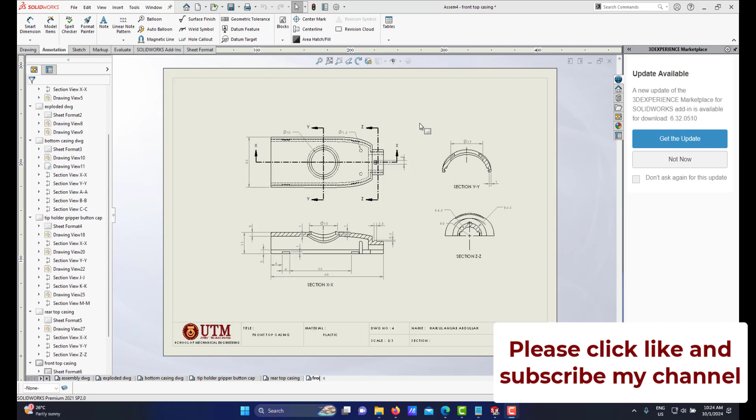Previously I showed you, in part 1 of my video, how I do part modeling of the main casing of the electric eraser, and I split it into top casing and bottom casing. Then I separately split the top casing into rear top casing and front top casing.

I've also shown you part modeling of the other components like the tip holder, the gripper, the push button, and the cap. Besides, I've shown you modeling of the AAA batteries, because that is a standard component, but it must be modeled in Solidworks to do assembly. I've also done modeling on the switch button and other standard components.

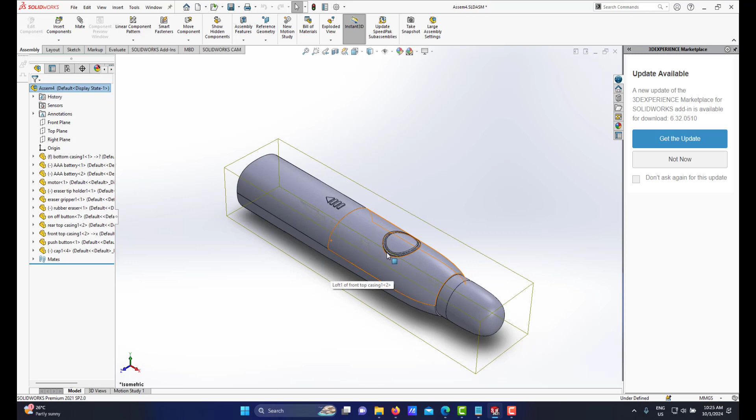I've shown you how I do part modeling of all the components, the parts of your electric eraser, and also how I do the assembly file of the electric eraser. So this is, as shown here, the exploded view, and we have this collapse view. I've already shown you that.

I've already shown you how I do this exploded view to show the exploded line sketch, and I've shown you a set of working drawings, how I do the assembly drawing, the exploded drawing, the bottom casing, and the other four components, the rear top casing and front top casing. So this will be a full set of your working drawing.

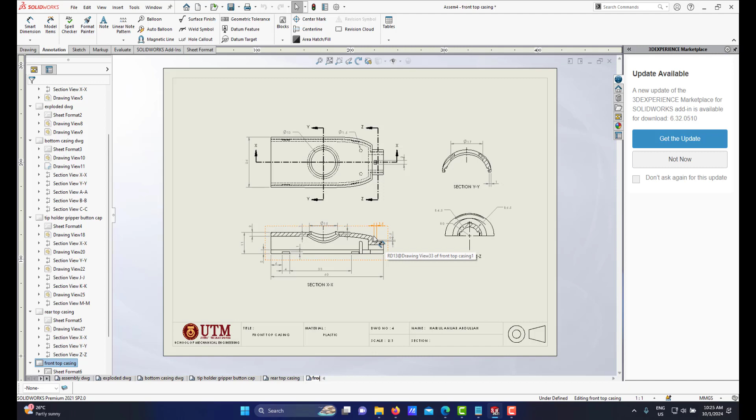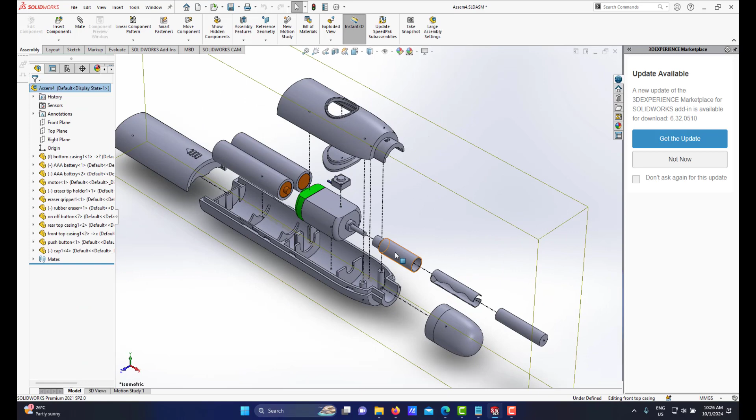This video I need to explain how you send your work. You upload it to e-learning. You have two categories, two parts to be uploaded. The first part will be your Solidworks assembly file plus your part modeling of each component.

To do this, you don't simply just save your assembly file and all your part modeling file and upload it to e-learning. That is not the way to do it. Because we need to do pack and go, you must do pack and go. It means it compiles everything, your assembly file together, because the assembly file is kind of like the parent. You compile it with all the children, all the part modeling of all the components involved in your assembly.

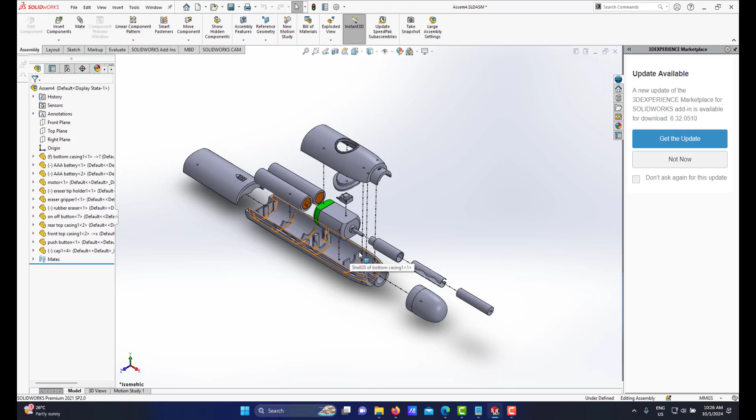So it will be packed into one package. To do this, you will do pack and go. You can save your assembly either in exploded mode or in collapse mode. For example, you save in this, which is acceptable, in exploded view mode.

To do pack and go, under the file here, you do not use save. Under file, what you do is go for pack and go. So in the menu here we have pack and go, and this menu appears.

Do not change anything. This all we have the assembly file together with all the part modeling files that we have done involved in your assembly will be selected. Do not change anything. Here, to save to folder, you will browse to where you want to put the pack and go file in your laptop.

I would suggest saving it to the desktop of your laptop. For example, I browse here, go to the desktop, and make a new folder, in my case folder number 9. So I will double click and select the folder, meaning my pack and go will be put under my desktop under new folder 9.

Do not change anything, just remain as it is, and I just click save. What it will do, Solidworks will pack and go. It will compile the assembly file together with the children, all the part modeling files, into one folder.

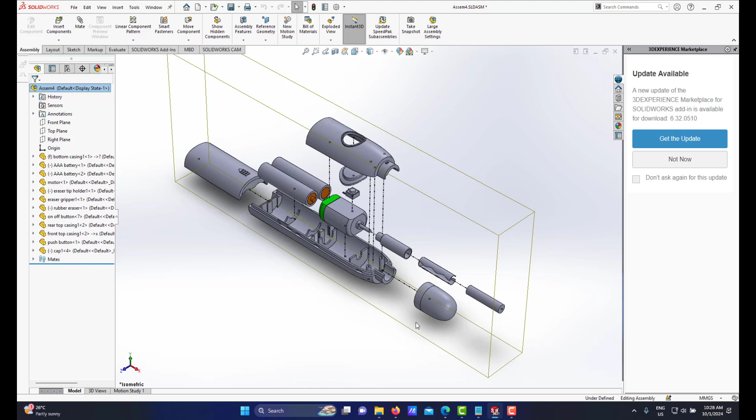Let me show you. Now this is my desktop screen. If you look under this new folder 9, we have all the parts, the assembly file together with the part files. Alright, another thing is I don't want you to do it like this.

What I want you to do is make sure in your laptop you have already installed what we call WinRAR or WinZip. I would suggest WinRAR. Install WinRAR, and you know what WinRAR is - you can compress it into one single file.

So what I will do here is select everything and right click. Under WinRAR here, I will make the name of this compressed file. This is a compressed file, I will compress it using WinRAR, then I name it, for example, electric eraser, and click OK. So it will compress into one file here.

So all the other files, I delete them. This electric eraser compressed file has a set of the assembly file and the part modeling files. This compressed file, you upload into your e-learning. So this will be part one.

About part two, it is a set of working drawings. If you look here, this is the set of your working drawing.

For part number two, this drawing, you will not upload this drawing because it is a SolidWorks drawing file. The format for the drawing is DRW. You will not do this. I want you to save it as a PDF.

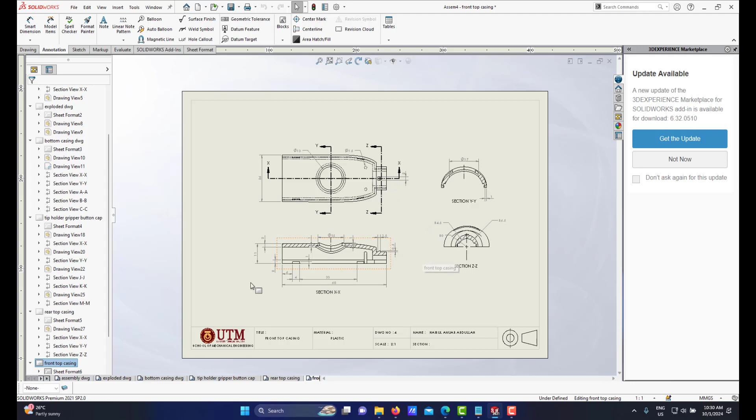Here, the first page is the assembly drawing. We have the first page, second page, exploded, up until the front top casing which is the last page. Make sure before you compile to make the one set of PDF, everything is done, as maybe you have some modification.

The title block is completed. The name is right, material is done. Your section, your name, drawing number also must be right. The scale must be right.

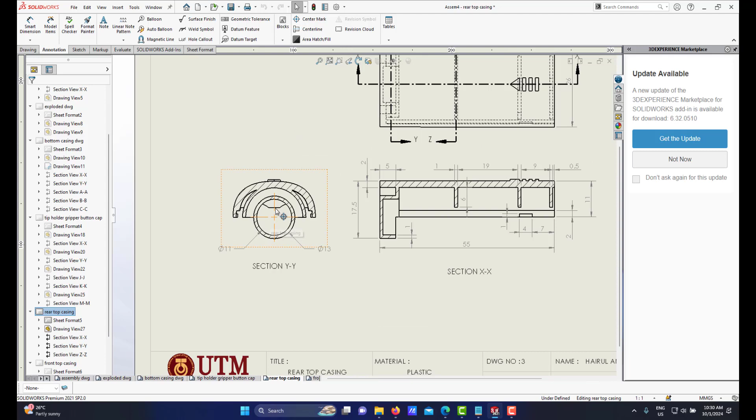For example, I want to make a final adjustment here. For example, here there is a kind of cylindrical shape. I must have the center line here under rotation, because that is a cylindrical shape. There must be a center line.

After you have made all the final adjustments and saved your file, then only you compile your set of working drawing as a PDF file. So how do we compile it as a PDF file?

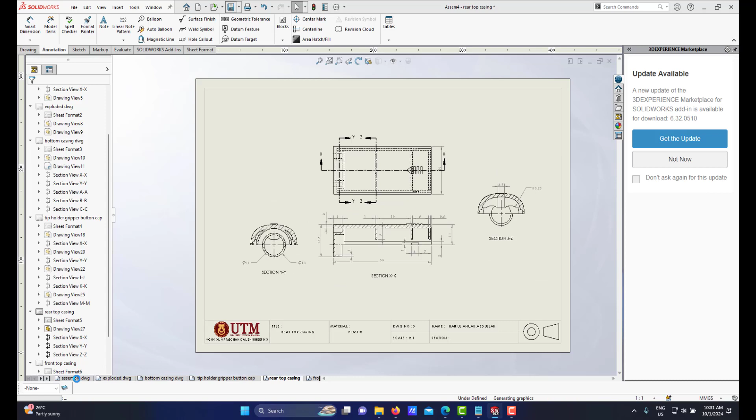Let me show you. A set, start from the assembly. Hold on, okay, this is your assembly drawing. So we will compile all the drawings up until front top casing into a single PDF file.

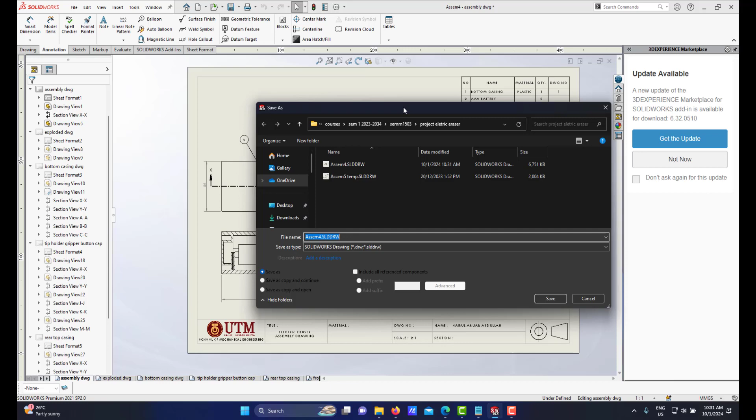So what we'll do here, under the file, you save as. So you have the option. Okay, this menu appears. Let's say I go for the desktop, my desktop, and I go for new folder 9 where I sent my pack and go file just now.

This one I will go for PDF. I will go for PDF and name it electric eraser working drawing. Then I will click save.

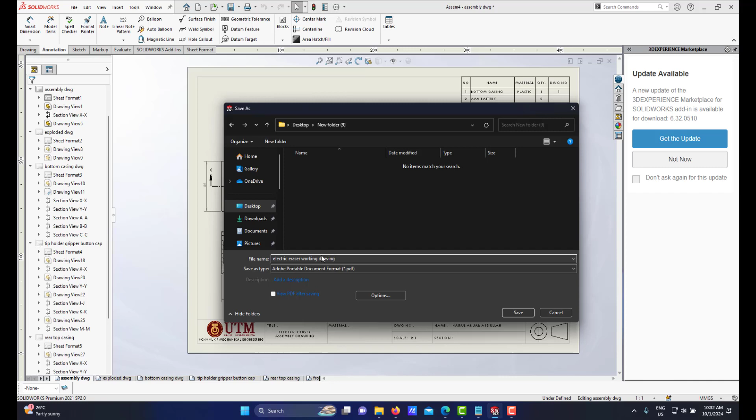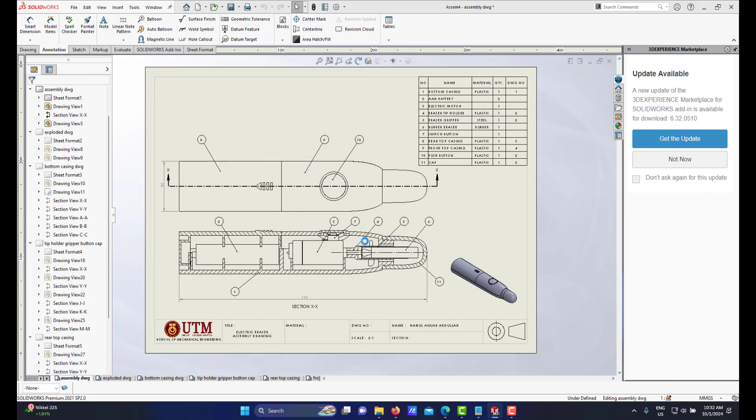Let me show you where the PDF file is. If I close this, under my new folder 9, I have electric eraser working drawing. If I click it, let me minimize the view. So we have a full set.

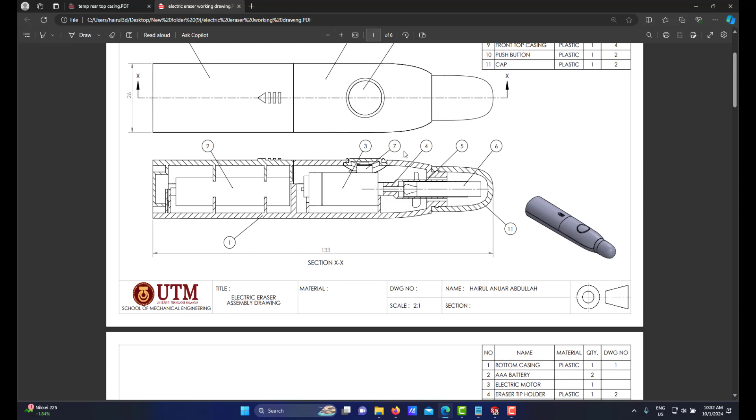We have the assembly drawing followed by the exploded drawing. Make sure that you organize your drawing in order. First must be the assembly drawing in 2D. Make sure everything is completed before you convert this to PDF.

I have a BOM. Make sure the BOM is really at the upper right corner, snapped at that borderline. Then number 2 must be the exploded drawing, with BOM and balloons.

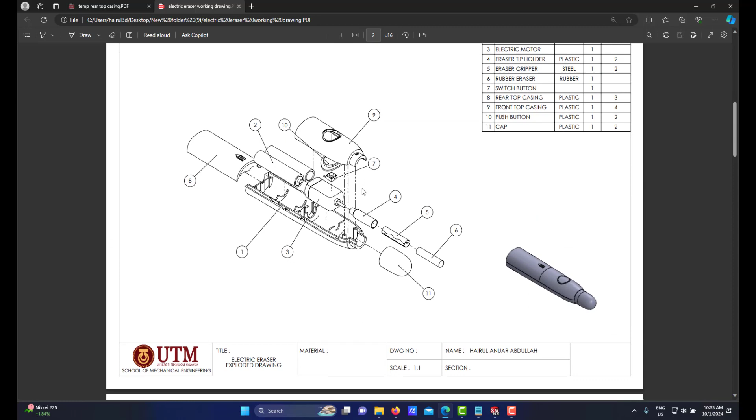We also have balloons here, followed by, as you can see, this bottom casing is 1. If we look at the BOM, it must follow drawing number 1 first, so this is the bottom casing. If you look at the BOM, battery we don't have a drawing, electric motor we don't have a drawing, eraser tip holder, gripper, and the push button is drawing number 2.

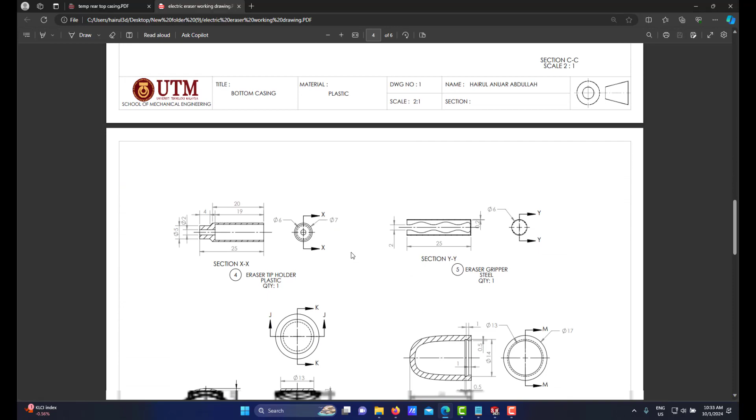Must be in order. If you don't make this in order, in terms of your file management system, your drawing management is not good. Drawing number 1 followed by this, drawing number 2.

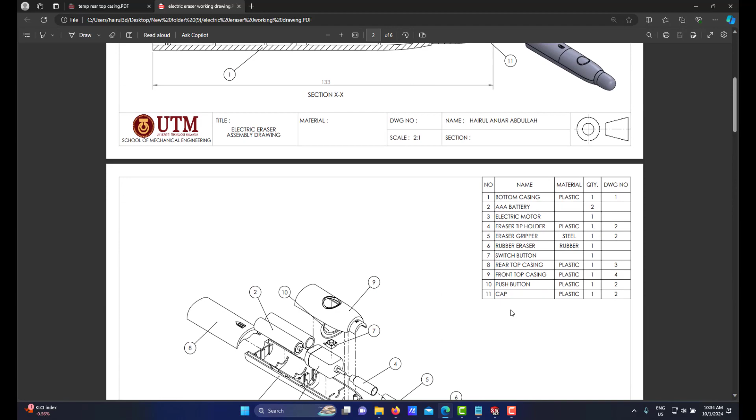Then we have drawing number 3, rear top casing, followed by front top casing, and the last one is the front top casing, drawing number 4, followed by drawing number 4. So this will be a full set of your working drawing.

Before I end this video, I would like to say that what you have learned in this course is not just about engineering drawing or basic SolidWorks. You guys also learned about activities involved in product design. What you've been doing is part modeling of your product, like mine in this example, electric eraser. You did part sketching on paper, then transferred it into part modeling in SolidWorks, then made an assembly, did an exploded view, and made a set of working drawing. All these activities are valuable knowledge that you have learned.

These are activities you are involved in when engaged in the engineering design process. So your CAD file that you have done, and also this set of working drawing, is a valuable property of yours, meaning it is your copyright. In industry involved in design and manufacturing, a set of CAD files plus a set of working drawing is a valuable property of the company, because this is engineering documentation that every company involved in design and manufacturing will have.

I think, inshallah, you guys, in the future, can do better product design, and I believe when you graduate from UTM, inshallah you can become an entrepreneur, set up a design company, and do collaboration with a manufacturing company. And it's about time for our country.

We're not just a country in industry that nowadays only has industry involved in manufacturing. It's about time that we do product design, design a product and also manufacture a product. This means you guys can form a company, collaborate with a manufacturing company. When you graduate from UTM, you're not seeking a job, but you create a job. I believe, inshallah, you guys will succeed in the future.